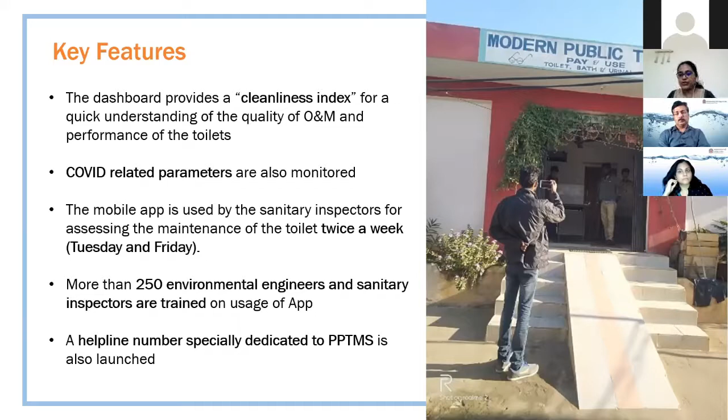As already told, mandatorily every week twice, every Tuesday and every Friday, the sanitary inspectors visit the toilets and assess the maintenance of the toilets using photographs and by responding to the indicators.

On the impact, it's been about 1.5 years since this app was launched, and we see the impact. All the ULBs have enthusiastically responded and are uploading the toilet information and also the monitoring related information. On average, about 85% of the toilets are being monitored twice a week.

About 100 plus ULBs are reviewing twice a week 100% of the toilets present in their towns. This is massive progress in the state, and periodic reviews are also conducted under the chairpersonship of CDMA sir, with ULB officials sent the report bi-weekly, on both review dates, to commissioners and other ULB officials.

WhatsApp groups are extensively used to post the status. On every review day, the reports will be posted on the WhatsApp groups, and the ULBs which have not done the reviews will be listed out separately, and the reasons will be taken. So even for appreciation, and also for letting them know they have not done the toilets, the WhatsApp groups are extensively used.

Recently, the PPTMS also won a Digital Technology Sabha Award under the Enterprise Applications category, and it has also been appreciated by several states and also by the national government.

This presentation is basically another initiative, again an ICT-based monitoring system with regard to containments. Containment in this case is a septic tank or on-site system. I think everybody agrees, and we have discussed at length in the past, that if we don't design the containment systems right, then it is not delivering the desired outcome, which is treatment, and the wastewater or fecal waste from the on-site system will be going directly into the nalas and drains. So this is one aspect which is bothering us, and hence we thought it would be much smarter if we enabled it with IT. And here we are not talking about the legacy toilets which are already built, but the toilets that are going to come up in the future.

I will take you through this quickly given the time limit. As we all know, we follow the IS code of practice, the Bureau of Indian Standard Code of Practice for building containment systems. Unfortunately, it is totally unregulated right now, and it is left to the masons, with no inspection like in other countries. Every toilet is inspected in Japan, like Johkasou systems, where they have not only inspection during construction but 4-time inspection with regard to performance.

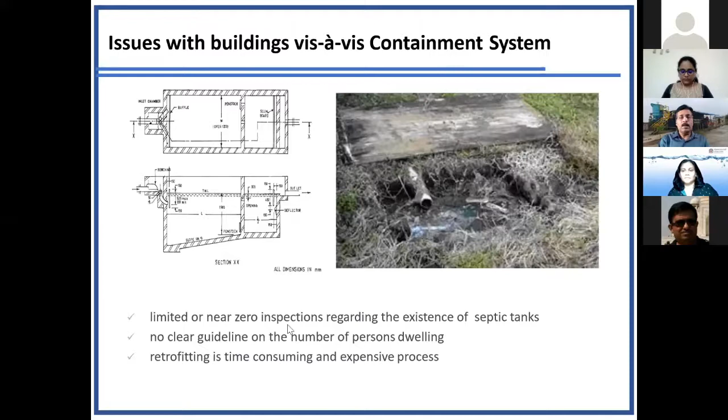And how do we do it? We follow very strict guidelines, IS 2470, which is also part of the CPHEEO manual.

With this IS 2470 guideline, we did a 100% survey in a town where we are working, and less than 40% of the households are complying with it. This means it's nothing but a toilet that isn't really a containment system, it's not an anaerobic digester, it's just a pass-through chamber, which is dangerous.

So what we did was integrate this toilet design into the building approval process. As part of Amrut, the smart city mission, and other reforms, building approval systems are automated. This is called the Auto Development Control Regulation System.

There is software, and many states - Andhra, Telangana, and a couple of others - have started this. Pune started much before many states, where the architect loads the building plan, and the software checks whether it complies with building bylaws and issues a no objection certificate within 5 minutes. This is a big reform for citizens.

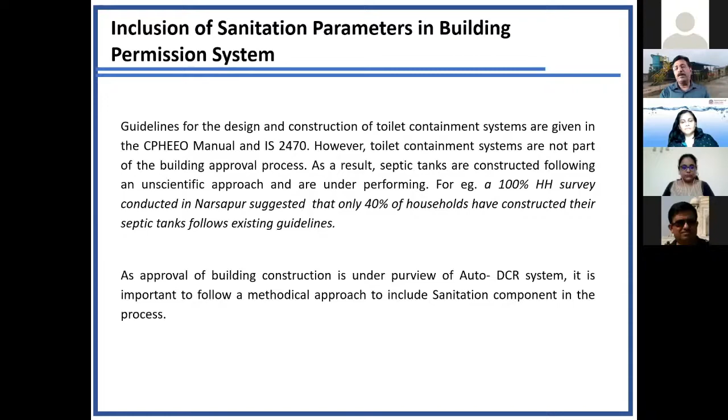What the Government of Telangana did was integrate the toilet design as part of the development permission management system. When you give building permission based on checks and balances in the building bylaws -

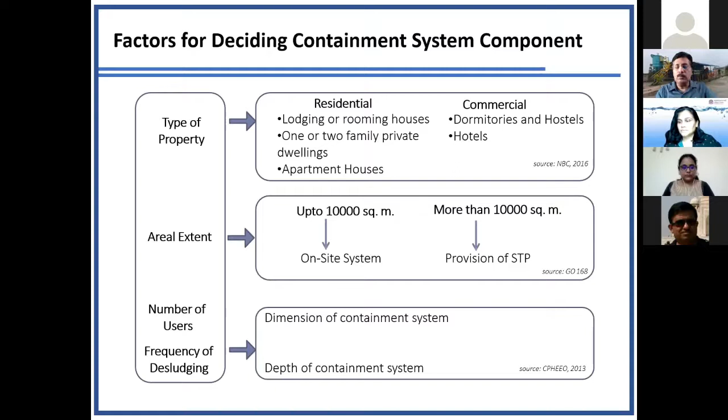When on-site sanitation is required, the system asks how many people live in the house, and how frequently they intend to do desludging. Accordingly, the dimensions are decided by the software, and it checks whether the builder or property owner coming up for approval has provided adequately or not.

Now this is just to give you the metrics. Number of users, if there are 5, then minimum 1.5 meter length is required, 0.75 meter breadth, and depth will be 1 meter. If it is a private dwelling, a lodging, or a rooming or a bigger property, then the number of users increases as well as the dimensions of the sanitation infrastructure has to improve to meet the requirements. This is not what we have designed.

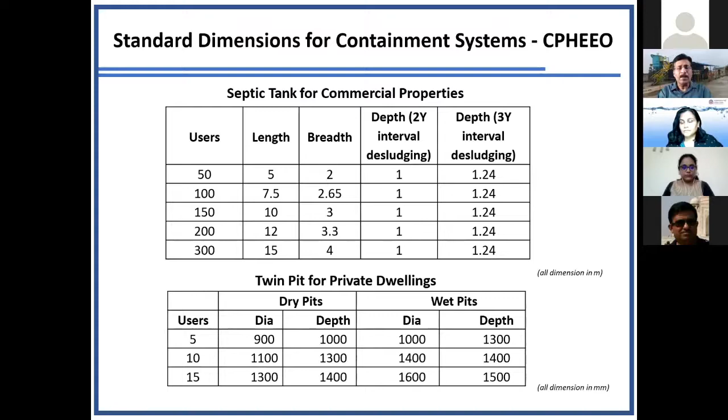We have taken the codes but integrated them into the software so that it checks whenever a household or a builder comes for approval, and then it issues a no objection certificate. So whether it is a twin pit or a commercial property or whatever it is, it automatically checks and then it approves or rejects.

For example, the input parameters we take are type of property, areal extent of the property, number of users, frequency of desludging, and CAD drawing. So the system automatically checks it, checks both superstructure as well as substructure, and issues the no objection certificate.

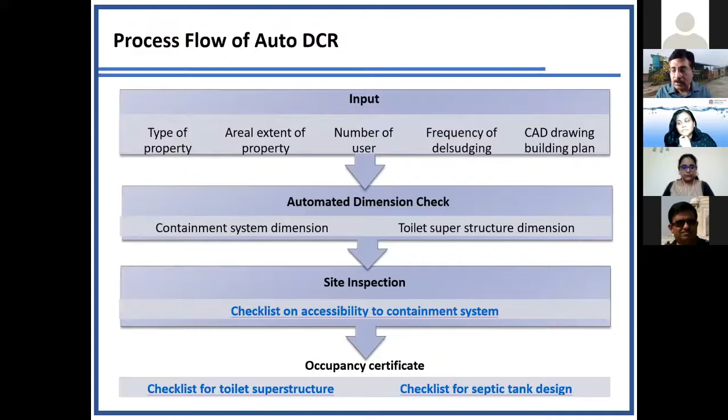After this is complete, when the construction begins, the town planning officer visits and site inspection happens twice - at the time of construction and finally at the time of occupation. Both times these are checked to see whether it is complying with the design standards as agreed by the household, and then the occupation certificate is given.

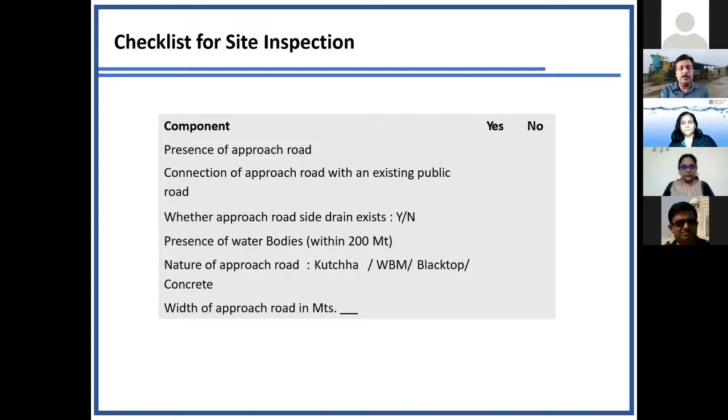Now these are the checklists - what should be checked when the town planning officer goes for site inspection, and what should be checked for the occupancy certificate. All these are automatically checked and codified in the mobile app, which is part of the regular inspection of the building, but on top of it, sanitation infrastructure is also validated.

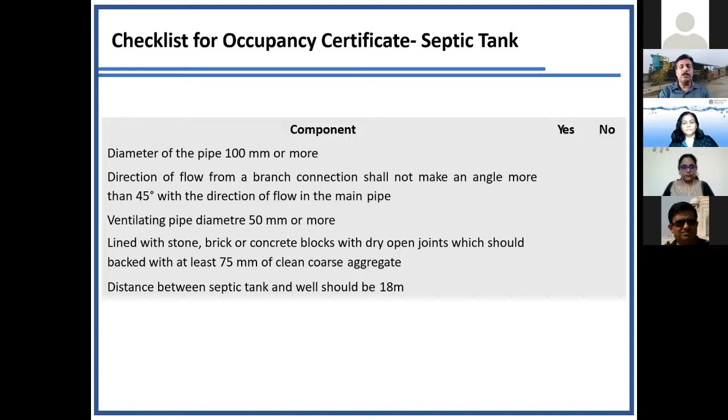So all I am saying is that this doesn't cost anything - be it Madhya Pradesh, Jharkhand, Assam or Maharashtra, wherever it may be, this auto DCR application is already in place.

All I request all of you to do, wherever possible, is to work with the concerned town planning department to integrate the sanitation component in the building plan approval process, so that when a building or property is approved for construction, it complies with the IS 2470 standards, rather than randomly building septic tanks without consideration of how many people are likely to stay in the property, and what should be the length, width, and breadth. This whole consideration should not happen without approval.

So that's all. This application is very, very simple. It took less than a week to modify all this. So that's all, Dr. Mali, I thought I would share this with you.

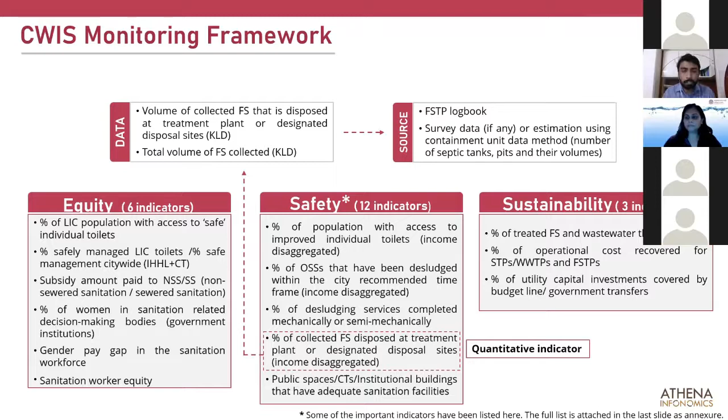Just to give you another example of an equity indicator, we are looking at sanitation workers' equity. One of the things we talked about was the percentage of sanitation workers covered by social security and health insurance, whether there's a presence of workers' union or not, and whether there's a legal channel for them, in case of any grievance or issues, a legal recourse to register a complaint or not. This can be taken from secondary data, government reports, or primary data through interviews with key stakeholders at the ULB level.

I'll not go into the details of all the indicators under responsibility, we have already covered them. But as I was mentioning, under responsibility we are looking at the legal mandate, and at the city level we are trying to understand whether the city is adhering to those legal mandates or not.

Accountability - if there are clear and progressive performance targets set at the national level, and whether the cities are reporting on it. I would draw your attention to the term used here - progressive targets. What we mean is, for example, service level benchmarks at the country level say the benchmark is 100% for percentage of households having access to safe sanitation infrastructure. However, we don't want cities to start with that - that's an ideal case scenario.